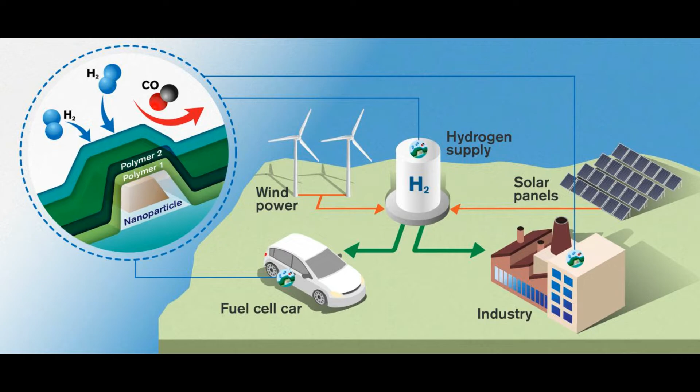My name is Lourdes Vega. I am a professor in the Chemical Engineering Department, the founder and director of the Research and Innovation Center on CO2 and Hydrogen, which we call RICH in short. We are not rich in money yet, but we are rich in knowledge. We hope to be rich in money also so that we can do more work in this area. And I'm also the senior director of the Petroleum Institute in Khalifa University.

There's quite a lot going on. Yes, but it's a hot topic also. It is, and that's what we're talking today. We're going to talk about the hydrogen part of RICH, not necessarily, well, carbon dioxide kind of comes into it a little bit, but we're mostly talking hydrogen today. And I wanted to talk about the hydrogen economy because I feel like that is such a huge topic at the moment. Everybody's talking about it.

And I don't know if you saw the news as well, but a couple of days ago, the first hydrogen-powered train set out in Germany. This train has now replaced diesel trains, fully run on hydrogen. And my first question to you is, I thought hydrogen fuel was rocket fuel.

Yes, well, hydrogen is putting itself as to be everywhere. But I tell you why. Because hydrogen is not new. I personally have been working on hydrogen for more than 20 years. I was working for a company before joining the university again, because I have been on both sides, that were delivering hydrogen. So hydrogen had ups and downs, and it depends on what the market will be. And that's what we have to think. Where is hydrogen to be used? If it's going to be used in many places, then it's a big market. If it's going to be only in one area, it's a small market. So the movements go with that.

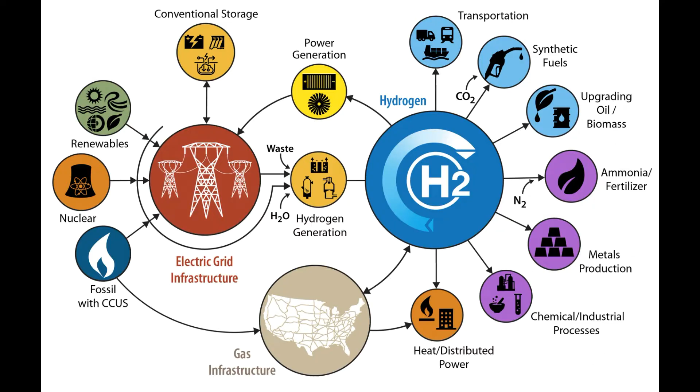So why do we talk about hydrogen now, as you say? Well, because there is a breakthrough in the use of hydrogen in the concept of decarbonizing the economy. And I will explain that. So we are emitting a lot, means a lot, of CO2 and other greenhouse gases into the atmosphere. If we don't do anything, we may destroy our planet, to tell the truth, in the sense that climate change is a fact, and it's a scientifically demonstrated fact. So there are actions towards avoiding or coping with this.

Yep, and this is, for example, the Paris Agreement. We will have here the COP28 next year. All these things, politicians, governments, people with power, are taking actions for this, forbidding things or coping with what we do, and this is clearly needed. So how do we do this? Because this decarbonization that we need is related to the quality of life that we have, the energy that we use, and all the transportation, all these things we need, correct?

Yeah, I mean, we demonize fossil fuels, but actually they're what brought us into this age where we're so connected, where we have all that we have. Exactly. So we are not going to stop that. You cannot tell anyone, hey, don't use your car anymore, go walking. This is not going to happen.

The same as the air conditioning. We are not talking about this, but refrigerants also have a great impact on the environment. We can talk about this another day. But the point is, are you going to tell people to stop the air conditioning? Not here, no. So then the point here is, how do we help the environment and the future generations without stopping the quality of life, the security in the energy that we have, etc.

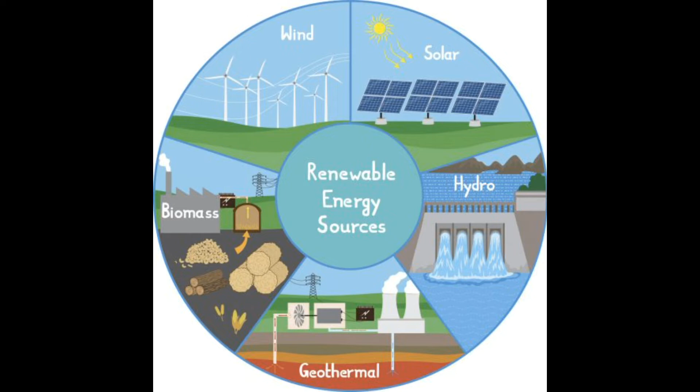So we talk, for example, about having renewable energy, which we do in the UAE. We have one of the cheapest solar energy in the world. So can we really replace all the energy we have today with fossil fuels from renewable energy? No. Why? Because we have the intermittency of the renewable energy, correct? The sun doesn't shine great all day long. Exactly. So the sun comes when it comes, and then sometimes we have the dust, so the sun won't arrive to where it has to arrive to produce energy. And then in other places, they rely on the wind, and the wind blows whenever it blows, etc.

Okay, this is the change and the breakthrough that we have with hydrogen now. So hydrogen has always been seen as a way of transportation because it has more autonomy than electrical cars, for example. And I have been involved in several projects in Europe before coming here on transportation using hydrogen.

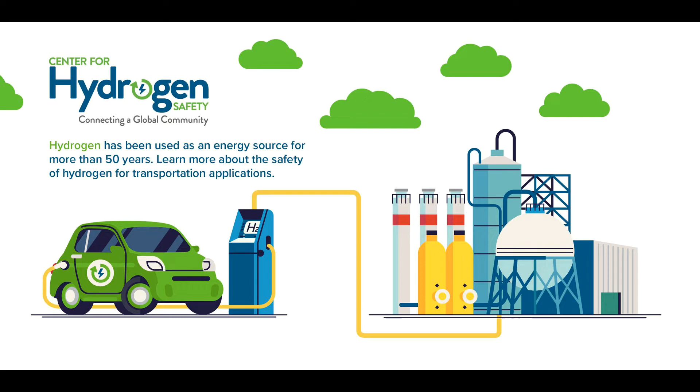That market is small, going back to the point. However, if we now link hydrogen to energy storage, we are covering the gap that we have on using renewable energies. Let me explain. This is, by the way, what is changing. We can put a lot of solar energy to compensate the demand that we have, so that we have the energy that we need. But in some cases, we can have an excess of solar energy which you cannot use because it's not demanded. So we produced way too much. Exactly, we can't store it for later. So it's just gone.

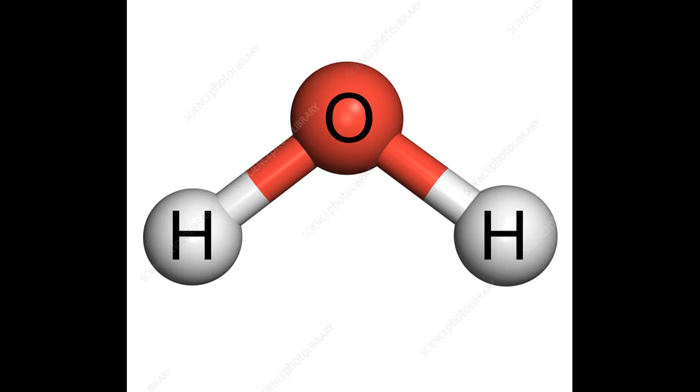So let's try to find a way to store hydrogen for the long term, to store solar energy or renewable energy for the long term. This is where hydrogen comes into play, because you can use the excess of renewable energy.

Breaking the water molecule is expensive in terms of energy. It requires a lot of energy to break the water molecule. Where are you getting the hydrogen? It's coming from splitting water. We'll talk about this later, including the colors of hydrogen. You'll see that hydrogen has no color, but we talk about many colors of hydrogen, which is interesting.

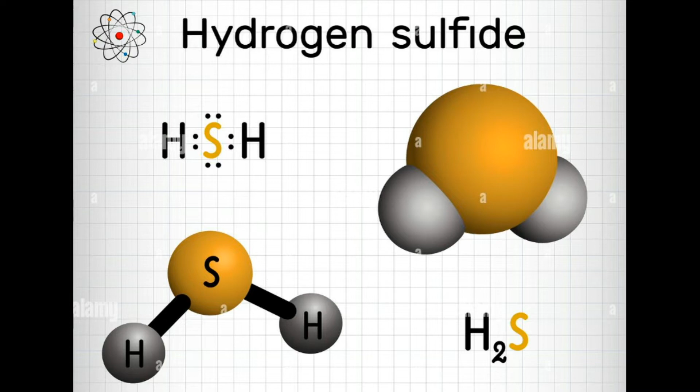So let me put that in the context of renewable energy and the decarbonized society that we need. If you use the excess of renewable energy to break the water molecule, or here in the UAE, we can also break the H2S molecule, so instead of oxygen it has sulfur, which is a byproduct from gas and oil, and we have a lot of that here. So if we break either water or H2S to produce oxygen and hydrogen in the case of water, or hydrogen and sulfur in the case of H2S, then we can use this hydrogen to produce power back when it's needed.

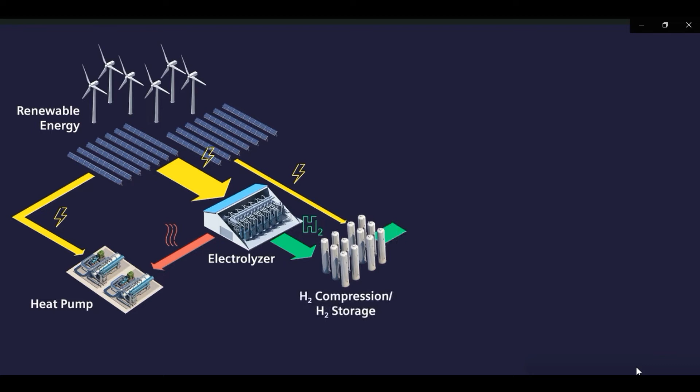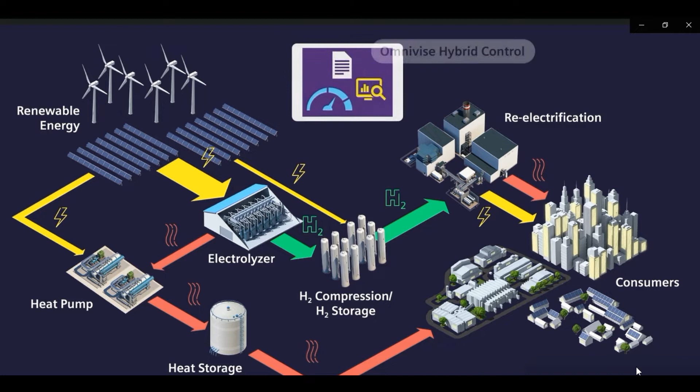So we've got power from the sun, that comes in as our renewable energy. There's only so much demand for that energy at the time, and we currently can't store it. So instead of just releasing that energy and saying oh well, we can put that into splitting these molecules to create more hydrogen that can be used for more energy. So there's nothing lost down the chain.

Well, in an ideal world it would be perfect if the way of converting hydrogen back to power had an efficiency of 100%. This is not the case, but still it's better. Yeah, it's better than nothing. Absolutely, exactly. So this is what is called today power-to-power. This is what I see as a big change, and that's why we're all talking about hydrogen in the context of net zero emissions, decarbonizing, etc.

Now, once you have all this hydrogen that you produce - we'll talk about the colors later - imagine this hydrogen we produce now can open many other applications. That will come to the train we were talking about. It could be also for transportation, for combined heat and power to replace natural gas, so less carbon emissions, or other applications in addition to the traditional applications of hydrogen, because we have always used hydrogen for refineries, for producing fertilizers, and for the chemical industry. Methanol production comes from hydrogen.

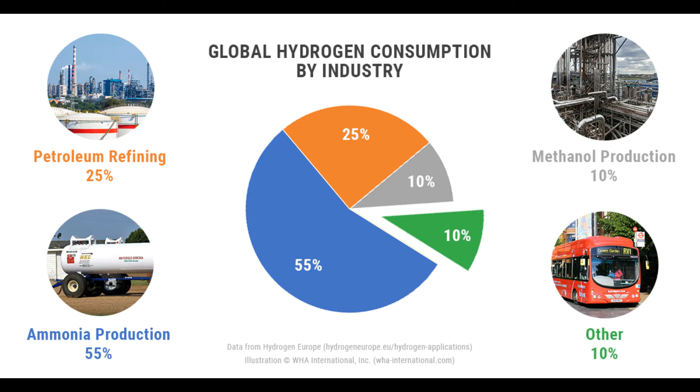I didn't know that. So these are the three main applications of hydrogen today, and we don't have more because the market was not ready for that. So together with the applications and with improving the efficiency on producing hydrogen, we are working on what other applications we can have of hydrogen.

Before we go on to the colors that you've mentioned a couple of times, I just want to touch on one thing you mentioned - energy security - because that's also a huge topic at the moment with everything going on in Europe particularly. And the production of hydrogen for use as fuel, can that help with our energy security needs? Or is there a bit of an issue with producing enough hydrogen to replace that?

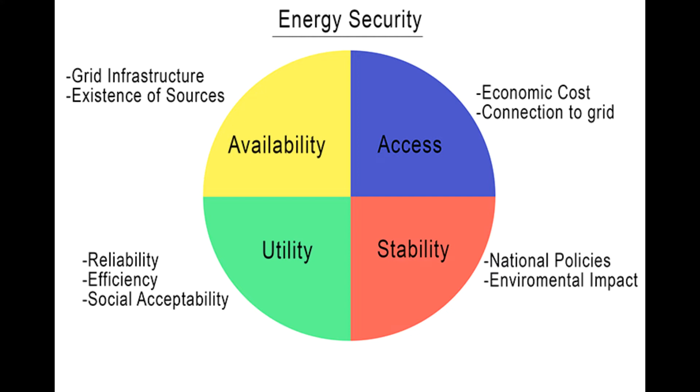Excellent question. Hydrogen is not the solution. This should be very clear for everyone, and I am a fan of hydrogen. Hydrogen is part of the solution, and this is the way we have to see it. And when we talk about how we produce hydrogen, we will see why it cannot be the solution.

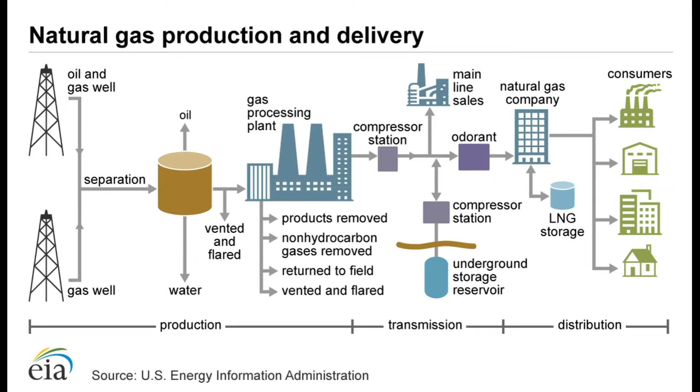So now in Europe, what is happening especially right now is that they were relying on all the energy production from natural gas from one source. So you put all the eggs in one basket, which is not the best way - turned out that wasn't the best idea, managing what you do. At that time it looks good, but in general this is not a good idea.

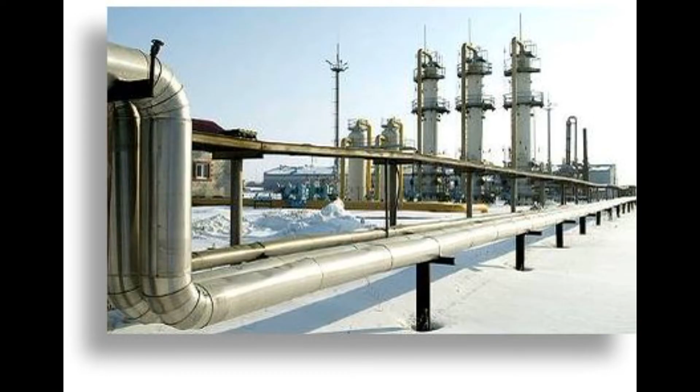In other places like the UAE, we have different sources of energy, so when one fails, you have another. In Europe, they have a system trying to remove producing power from carbon, which is more noble with the environment, since carbon produces a lot of CO2. Using natural gas has less emissions into the atmosphere than carbon power plants, but it was combined with other sources of energy. The point is that other sources of energy used to be very expensive, and now natural gas is more expensive than the other sources.

Would hydrogen be the solution? I don't think so, at least not hydrogen from water, and we will say why. We need to diversify the way we produce energy, and that depends very much on where you are—where are your natural sources to produce hydrogen? The UAE is amazing because this country is rich on everything: rich on methane, natural gas, oil, which is what we have been doing before, and that came with the wealth of this part of the world.

But the country is also rich in sun, so you can produce renewable energies. We are not rich in water though, which is a problem. But if you produce hydrogen from saline water, then we have a solution. We still have to work on this—we are working on this in the Rich Center.

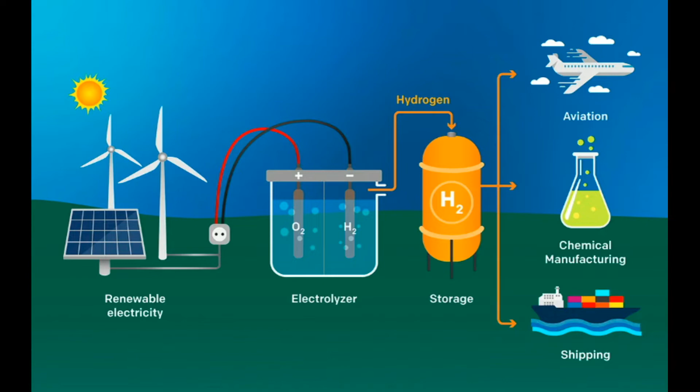But there is research at the lab scale, and not only us, other people are doing this. We have to be smart about building better reactors or electrolyzers that can handle this directly at a large scale. Right now, in the project we have in Dubai—DEWA, which is not the only one but a very important one—we have very cheap solar power, so we can break the water molecule, but this water is desalinated water. So why would you use desalinated water for hydrogen instead of other uses? You really need an excess of water to do this. So it's tricky.

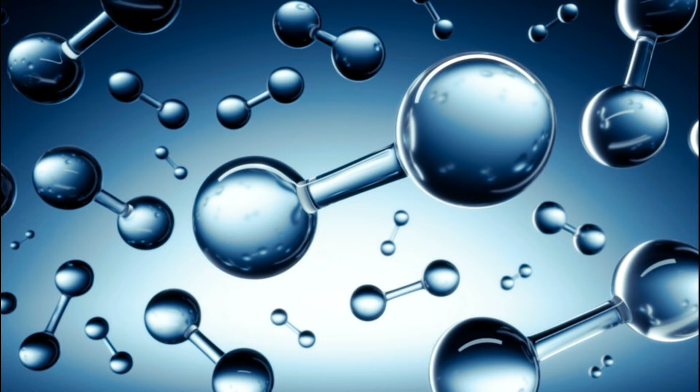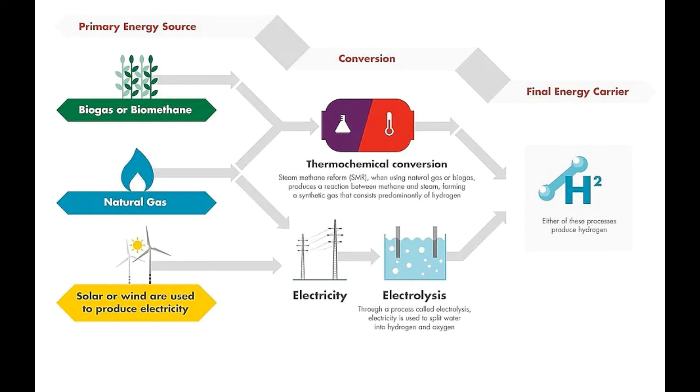Maybe we can now talk about the colors of hydrogen. Hydrogen itself has no color and no odor either. It's a very light component, everywhere in nature—it's the most abundant element we have on Earth, not only on Earth, everywhere. But you don't find hydrogen alone; it's always with something else.

So how do we produce hydrogen if we don't find it alone? The traditional industrial way of producing hydrogen for the three applications I mentioned—refinery, fertilizers/ammonia, and chemicals—is what we call steam methane reforming, which I'll explain. Steam is water, methane is CH4, natural gas. Reforming is a chemical reactor process. Essentially, think of a box: what's entering is methane, water, and energy. The reaction happens inside, and what leaves the reactor is hydrogen and CO2.

Because we have H2O and CH4 bunched together, you break them apart, and you produce CO2—carbon coming from the methane, oxygen coming from the water—and all the hydrogen coming from these two. This energy takes on average 7.4 megawatts per hour.

Now if you do the same but instead of methane you use water, entering your box you'll have only water, no methane, and energy. And exiting you'll have hydrogen and oxygen, no CO2. For producing the same amount of hydrogen—say 1 ton, the number I gave before—you need about 9 tons of water, and then 34.5 megawatts per hour. That's a lot more.

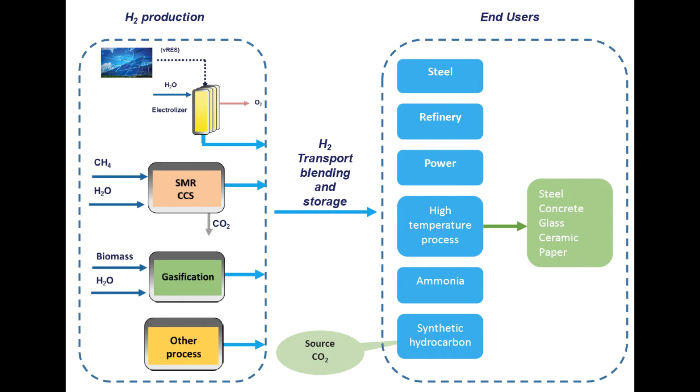Exactly. So that's why when we talk about producing hydrogen from water, we need renewable energy. Otherwise we will use much more energy to produce hydrogen than we use today to produce it with methane. At which point there's no point. There is a point if you have an excess of renewable energy. But if you don't have renewable energy and you're relying on fossil fuels to do it, that's what I mean.

So let me put names to the two colors of hydrogen. The hydrogen we produce from steam methane reforming, sending the CO2 to the atmosphere and using the hydrogen, that's what we call gray hydrogen. Now, the hydrogen we produce using water and energy to produce hydrogen and oxygen, with renewable energy, is what we call green hydrogen.

Now, remember my first process, the one that is used today in industry. If I put a unit to capture the CO2 so that it doesn't go into the atmosphere, then this is called blue hydrogen. This will require more energy because I have to add one unit to capture the CO2, but it will be low carbon hydrogen. So you see in the media a lot about the UAE going to export, because we produce much more than what we need for the country, blue and green hydrogen. You see now where it comes from.

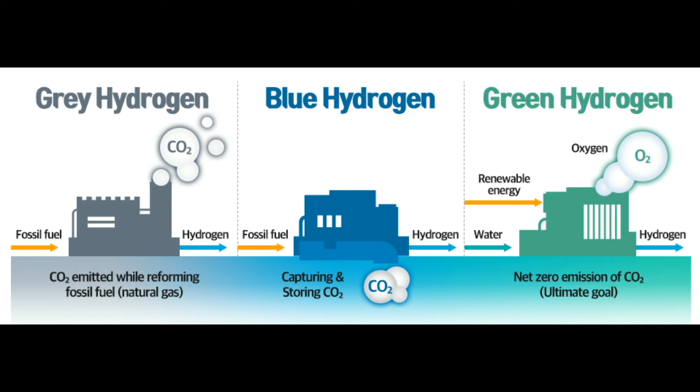So for customers that want low carbon hydrogen, we can sell blue hydrogen and green hydrogen. And you see now also in the RICH Center, we work on CO2 and hydrogen. So it all matches, correct?

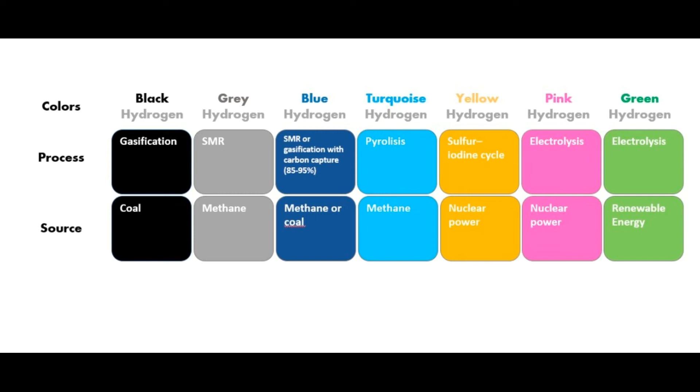But now there are other colors of hydrogen you can produce. For example, if you use nuclear energy instead of the energy from the grid, which we also have here, this hydrogen has two names, I don't know why. One is purple and the other is even three names: pink or yellow. So I don't know why they still didn't agree on the name of that hydrogen. Purple is the most standard name, but it could also be yellow in some cases.

You can also get hydrogen from biomass, like from biogas, or from dark fermentation, using microorganisms to produce hydrogen. So this hydrogen is usually white hydrogen or biohydrogen. There is so much going on here. Yeah, wait, it didn't finish.

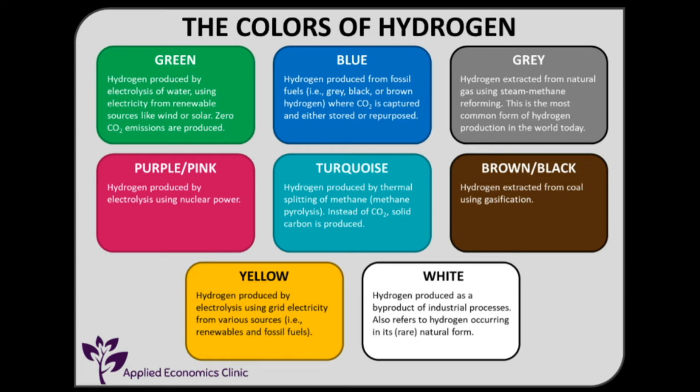We also have turquoise hydrogen. The turquoise hydrogen is what you get - remember, methane has CH4, so 4 atoms of hydrogen. So if you use a pyrolysis process, burning the methane, you can get carbon, black carbon, and hydrogen. That's turquoise hydrogen. Of course, this is energy intensive, but it doesn't produce CO2. So there are all these colors of hydrogen - the names come not because hydrogen has any color when it leaves the process, but because of the way it is produced.

Some of them are low carbon to zero carbon emissions. Some of them will have more CO2 emissions. I'm assuming then the challenge comes from which way of producing it is best for which use case.

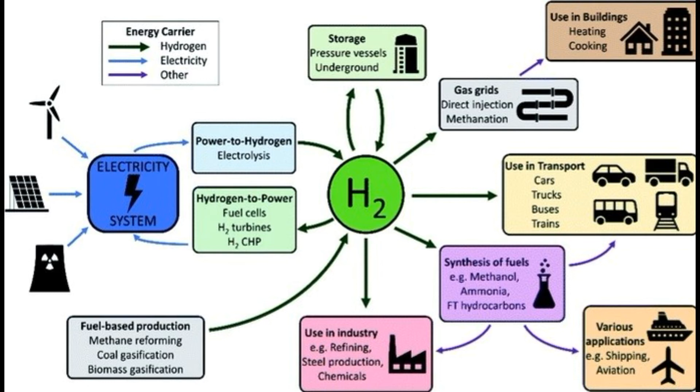Exactly. So it goes with what are my natural resources first, because I need to produce it from whatever I have. For example, Spain has a big, very ambitious plan on using hydrogen and delivering it everywhere. They have a lot of sun as well, and also water, much more than us. And they have no methane. So there is no way they can produce blue hydrogen, but they can produce green hydrogen. They need to have the excess of energy we mentioned before to make it economically viable.

So then, for example, Japan has no ways to produce hydrogen. So they will import hydrogen from the UAE, from Saudi Arabia, etc. They are asking, and this is the whole thing here, Japan is asking for low carbon hydrogen. So we cannot sell gray hydrogen. We have to sell blue or green hydrogen.

I want to give you another number, and then we may talk about science if you want. But this number is very important. Of the hydrogen that is produced today, mainly used for refineries, fertilizers, ammonia, and chemicals, 76% is produced gray. Only 2% is green. And the other is produced from coal, that I didn't mention - black or brown, by gasifying coal. Mainly in China. So yeah, this is what we have.

Why am I telling you this? Because my students the other day were so enthusiastic, talking about green hydrogen like this is a reality. No, this is not a reality at large scale yet. Yes, we are working on it, but we still need research and development and investment, because we need to improve the efficiency of the electrolysis, where you produce hydrogen from water. For example, you can use other sources that will be better.

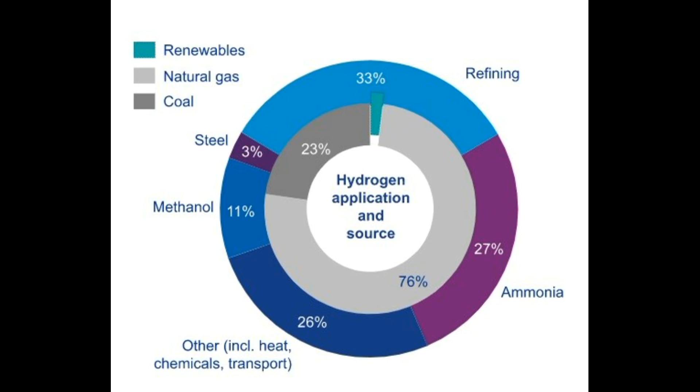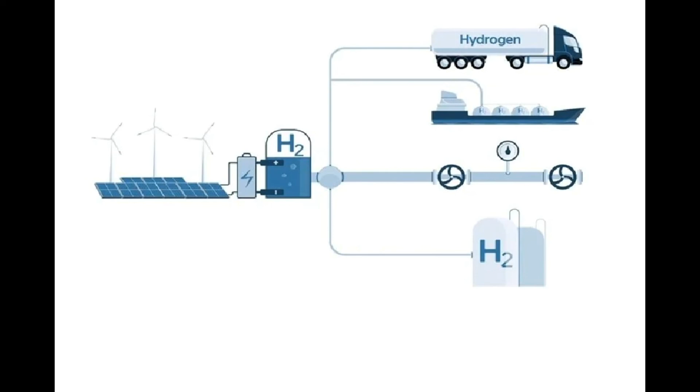For example, in RICH we are working on photocatalytic, which means using directly the sun. Instead of using the sun to produce energy, we use the sun directly to break the molecule. But you need to have a better catalyst for this, etc.

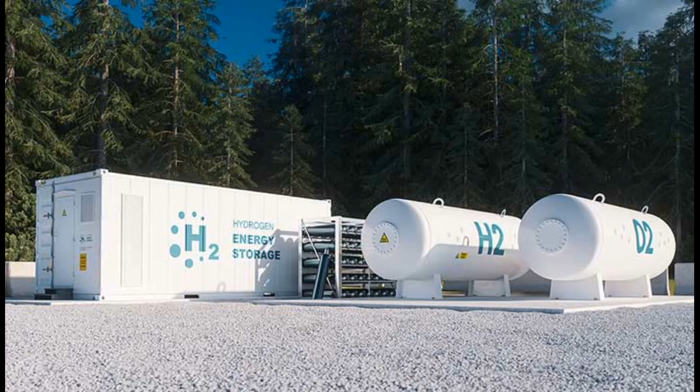Once you produce the hydrogen, there is another question: what do we do with the hydrogen? Imagine we can produce a lot of hydrogen, but now we need to store it if we're going to use it, or transport it to where it's going to go. And when it gets there, it has to be stored, or used for different applications. There are more challenges associated with that.

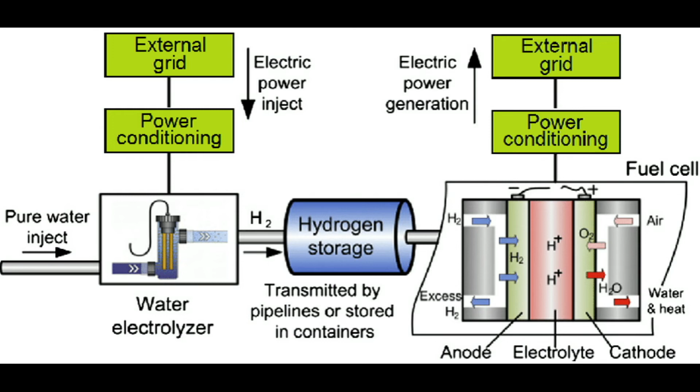Is that the hydrogen that blows up? Hydrogen is flammable, highly flammable. But this is good and bad. I have a photo I can show you later of what happens if you have an ignition, a fire, in a hydrogen car versus a gasoline car. The gasoline car is much more dangerous, because it's heavier, so it will flare from the bottom and explode. The hydrogen car, it will go to the top because it's very light.

So yes, in order to use hydrogen, same as natural gas or gasoline, we have to take into account safety. And this safety will come with the properties of this gas. That goes back again to transportation.

This gas is very light, the density is very small. So in order to transport this, we need to compress it. When we talk about compression, we talk about energy again, because you have to push something to increase the pressure. That requires energy, which means cost. And because of the low density, you have to compress a lot. So to have liquid hydrogen, you need a lot of compression. Not only that, the temperature has to be very low to have it liquid, so you need cryogenic tanks or something very well insulated.

So how do we transport the hydrogen? One option is compressed or liquid. The other is putting the hydrogen into some molecules, for example liquid organic hydrogen carriers that will absorb it as a liquid. Then by changing the conditions, the pressure or the temperature, you can release the hydrogen. That's clever. But there are other ways, which is the one thought to be used now at large scale: converting hydrogen into ammonia.

A little bit of chemistry again. Ammonia is the fertilizer. Ammonia is N, nitrogen, H3 — one atom of nitrogen, three atoms of hydrogen. Not four like methane, but more than water, which has two. And it's easier to break. Right, that was going to be my question: where's the point in breaking it from one thing to make it into another thing, to then break it again? Why are we doing this?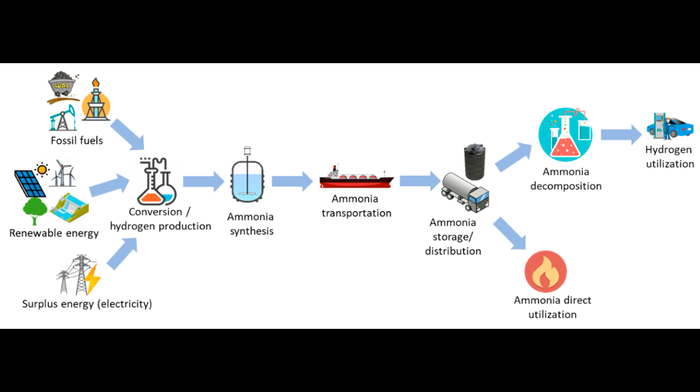So you can produce hydrogen however you want, and convert that into ammonia by an industrial process that is very well known and mature. Now it will be green ammonia, which you see in the media — if the hydrogen is green, it will be green ammonia; if the hydrogen is blue, it will be blue ammonia. This ammonia is a liquid, so you can transport it very easily, over long distances, like from the UAE to Japan, or from Australia to Japan, etc.

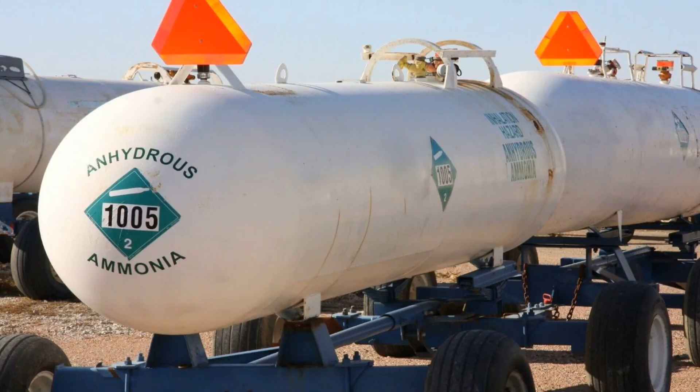Once you get the ammonia, now you have to decide: can I use the ammonia directly as a fuel? This is something we are investigating — Dr. Dimitri Kyritsis is doing that in the RICH Center, we have a lab there to work on this. So you can use ammonia directly as a fuel, though there is still research going on to avoid emissions, etc. Or you can break the ammonia molecule again, or have ammonia mixed with some other things. But for sure, transporting hydrogen as ammonia is safe in the sense that it's easy to handle. It's toxic and still flammable, but it's easier.

All of this sounds so exciting and so brilliant, we're doing all these cool things. But to me it sounds still very intensive, especially from an energy sense, but also a cost sense. Is it not? Because that's my concern about it.

It's like, yes, we're doing all of this, but we need all of this energy to transport it, and we need all of this energy to break it. So is it still a good payoff in the end? Of course. It depends on how much do you care about decarbonizing. Correct? So if you have to pay a tax for emitting CO2 or other greenhouse gases into the atmosphere, the whole thing starts to make sense.

And this is where it comes. And hydrogen, as I say, has been used always because it's needed for this application. So now what we are doing is using it in the context of decarbonizing, which now with the war, it's going to be a little bit delayed, I think. But I hope it comes back again. And it's one of these solutions to decarbonize the society. Again, it's not that we will solve everything with hydrogen. We need to have this very clear.

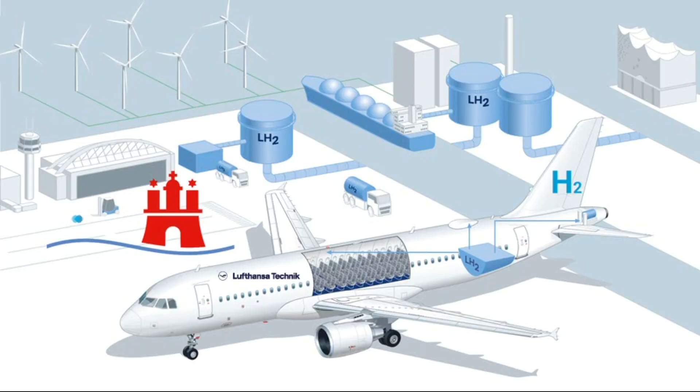We cannot oversell hydrogen. But hydrogen can be used for sectors for which it's very difficult to avoid CO2 emissions, which we call hard to abate sectors. For example, aviation. So aviation is one of the huge markets in this country. We have two of the largest airlines in the world. Yeah, but I'm also thinking rocket fuel again.

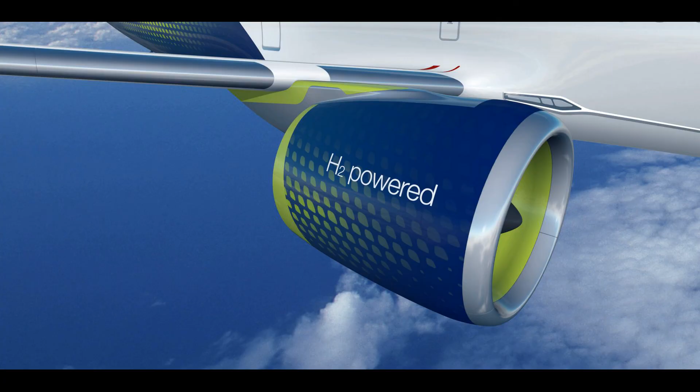No, let me explain to you. So what happened is the fuel that you use for aviation is very specific. It's kerosene. It's not the gasoline we use in the cars. It's another one. And it emits a lot of CO2, and over long distances, a lot of CO2.

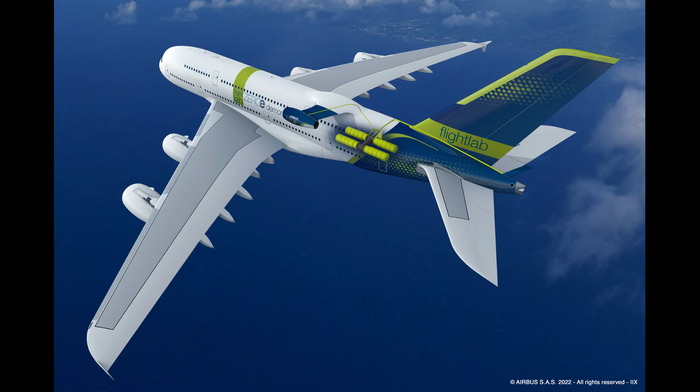I guess you have seen that we pay actually part of the taxes, no? I went to the US in May and I have to pay twice the taxes. One is because when I bought the air ticket, it says already there I was paying the taxes. But then when I arrived, the organizers of the conference say, we have to pay the taxes of the CO2 we were emitting. And I said, someone is becoming rich here, no? But the environment is still suffering the same. So let's try to change that.

Yes. So there is an urgent need to do this, and there are actions taken in this direction clearly. So kerosene is mainly the fuel we use in airplanes. Can we have a synthetic kerosene instead of having the kerosene that is produced from fossil fuels right now? Yes or not? Or can we have other fuel that is not that fuel?

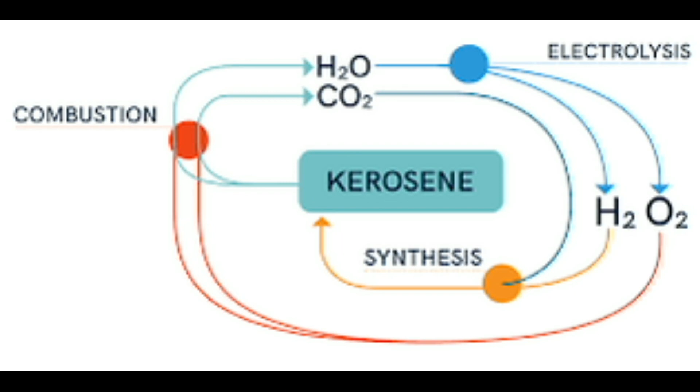So there is a huge movement on using what is called synthetic fuels for aviation, in which you can use this green hydrogen and the CO2 that you capture. And then if you react CO2 with hydrogen, you can produce methanol. And from methanol, you can produce synthetic kerosene.

As of today, I will use a sentence we use in my country: we are killing a fly with a cannon. Because it's like, my God, how much energy do you need to produce hydrogen to capture the CO2 just to produce the same thing that you have right now? But if you do the balance on the CO2 emissions, this has non-CO2 emissions, net non-CO2 emissions.

But we are working on other solutions, correct? For example, and there are different companies doing different things and different research centers doing different things. Can we have a hydrogen airplane? Can we have an electric airplane? So electric is difficult, correct? Because how much time do you need to charge this? This is why this is called a hard to abate sector.

Yeah, you don't want to run out of energy. No, because just to charge your car, you need 8 hours. Imagine an airplane, correct? But there are companies, for example, Airbus is designing a hydrogen airplane and a hydrogen airport, and this is happening in Germany, where the trains are also there. So Germany is really leading many of the hydrogen applications and lowering the cost, etc.

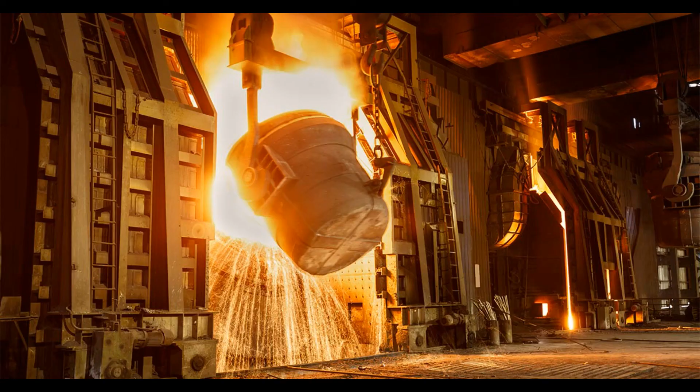Maritime, the boats. Yeah, all logistics, all supply chain. So all these logistics are hard to abate sectors: trucks, buses, trains. In some of them it's much easier to put hydrogen. In some of them it's more difficult, like an airplane, because you really need to design the whole airplane, and then how do you put the fuel cells, etc. But this is going in this direction. So hydrogen can help in these hard to abate sectors.

For example, for making steel also, there are green steel factories. Steel also produces a lot of CO2, very difficult to remove. So if you can replace part of the steel factory by hydrogen, or by capturing the CO2, we'll have green factories. This goes into: we need to do many different things to decarbonize this society, and hydrogen is one of them, but it's not the only one.